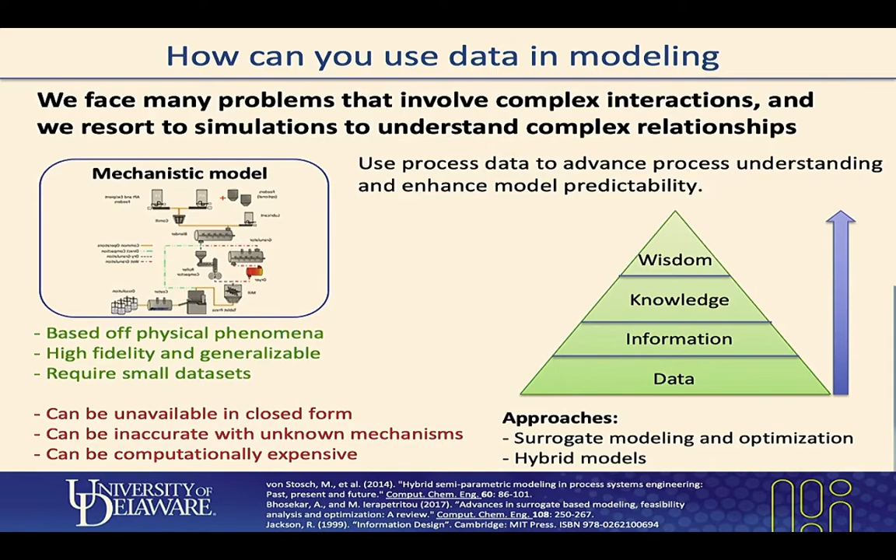So how can you bring this into the picture of real situations? There are a number of different techniques that appear in the literature, and I'm going to focus just on the simple surrogate models and hybrid models that take the data from different resources. It could be laboratory experiments, it could be data from the plant, or it could be data from large-scale simulations.

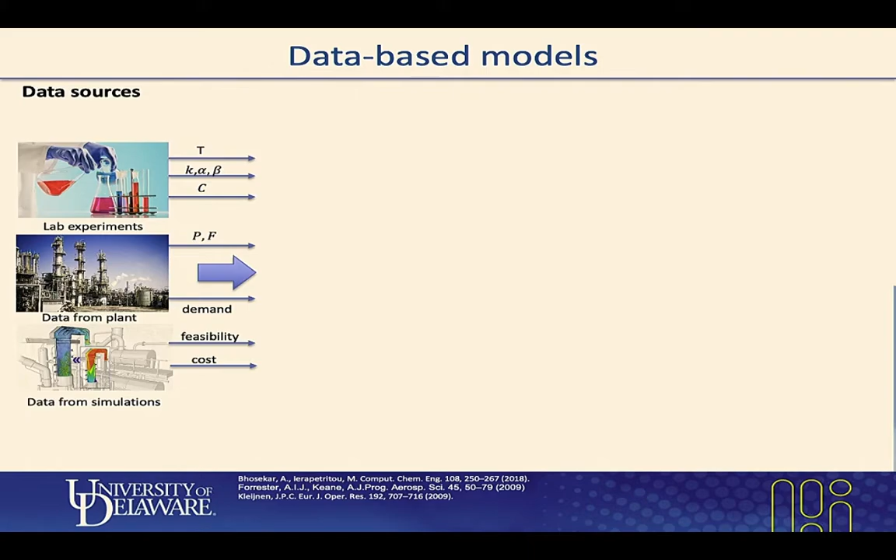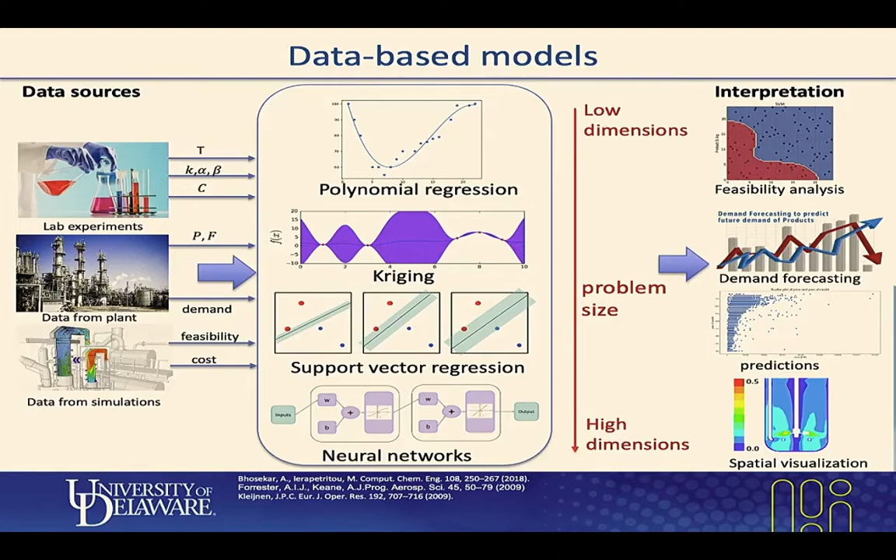Those data can be connected to different parameters that you have or different process variables. And then we utilize a plethora of tools to be able to extract some information about the system. This information could be, and I'm going to show you some applications, whether the process is feasible or not feasible, how can I use demand forecasting to do predictions, or how can I use very detailed computational modeling to produce better products.

So the models that we have seen from this community are either black box models that basically deal with the input-output data, where we're trying to fit some forms, some functions, in order to explain what is the connecting function between the inputs and the outputs, or different combinations of hybrid models, so we can get some idea about different functional groups and incorporate this with our understanding of the data.

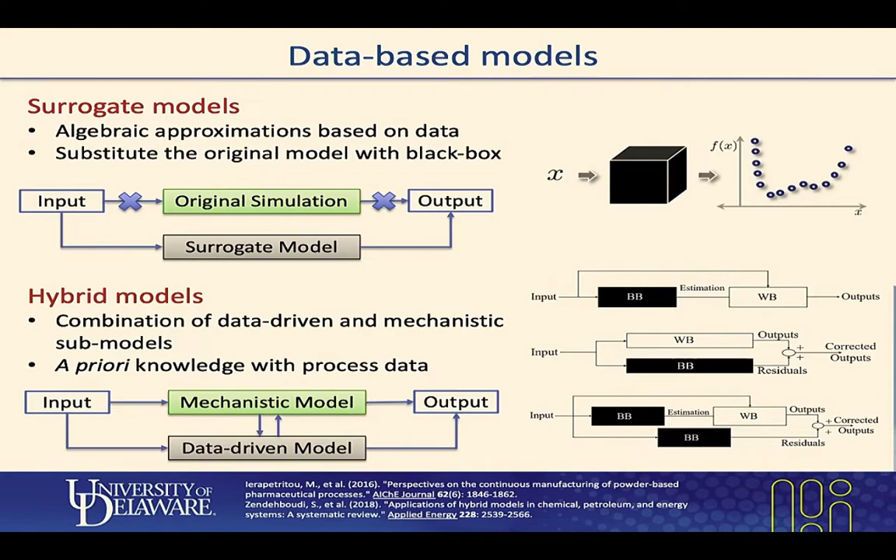I do like to point out the work that Professor Fani Boukouvala is doing, and actually presented yesterday, about the work towards how you can do that more efficiently.

So we have looked at this problem, and we have actually derived two different ideas of how you can do that: either by doing just a sampling and then building the models, and the models could be stationary, or using some type of adaptive sampling to be able to much more intelligently sample the space and produce, using some type of criterion of where these points should be, then stop and use the model.

So if the question is adaptive or not adaptive, then the answer is it depends. If we have a case where you can do both, then trying to extract the best by utilizing the fact that you have just a limited computational resource, it's better to do adaptive. But this is not always the case.

So when you don't have this luxury, and this is where you are having only historical data, so you cannot produce more data as you go, then of course you can just use the data that you have and build out of this. But when you have the capability of doing some more experiments, then this adaptive framework can help you identify where to put that.

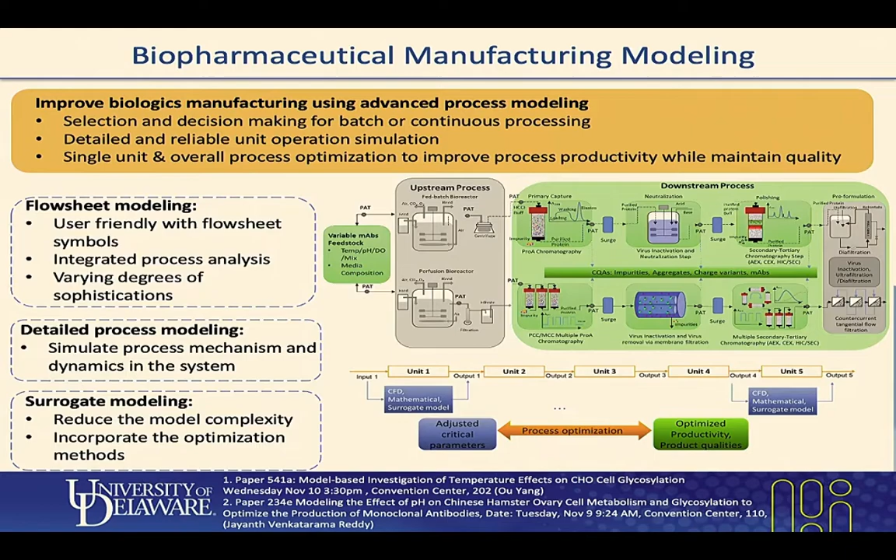So a model is complicated, so even if you come with a very detailed mechanistic model, you need some type of information extraction so you can better utilize, optimize, and so on. That's basically what we've been working on, and in my group there are 2 papers actually given in this conference from students, Yang and Jayanth.

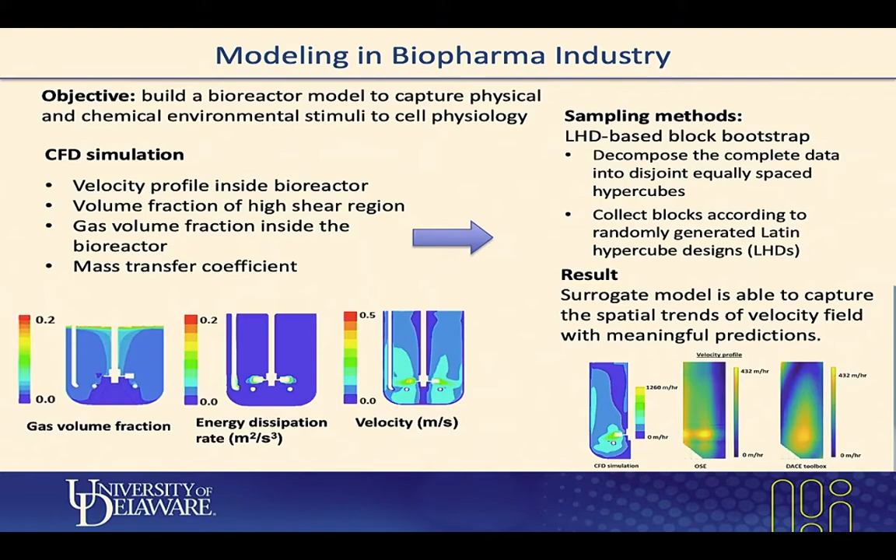Jayanth just gave a talk a couple of minutes before this. We're trying to capture this computational fluid dynamics, but also the metabolic model, and then produce a surrogate model that can extract the necessary information which is needed. We're using a Gaussian process estimator that can predict the behavior of this system at different operating conditions. So if you were able to do that, having the integrating model so we can capture the different effects we see, and then optimize it.

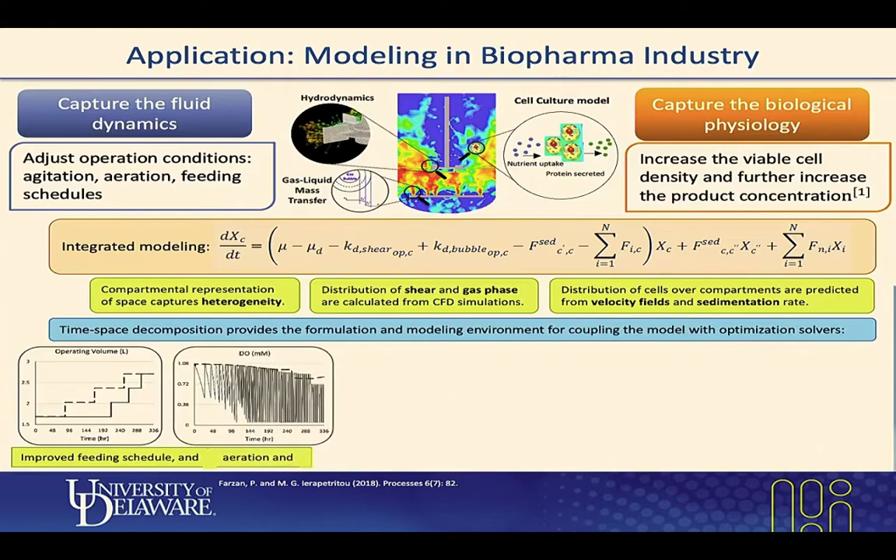So we can optimize the feeding schedule, optimize aeration, agitation policy, and of course be able to keep the cells alive and produce the right product. That's an example of how you can utilize surrogate modeling to capture information from an expensive simulation.

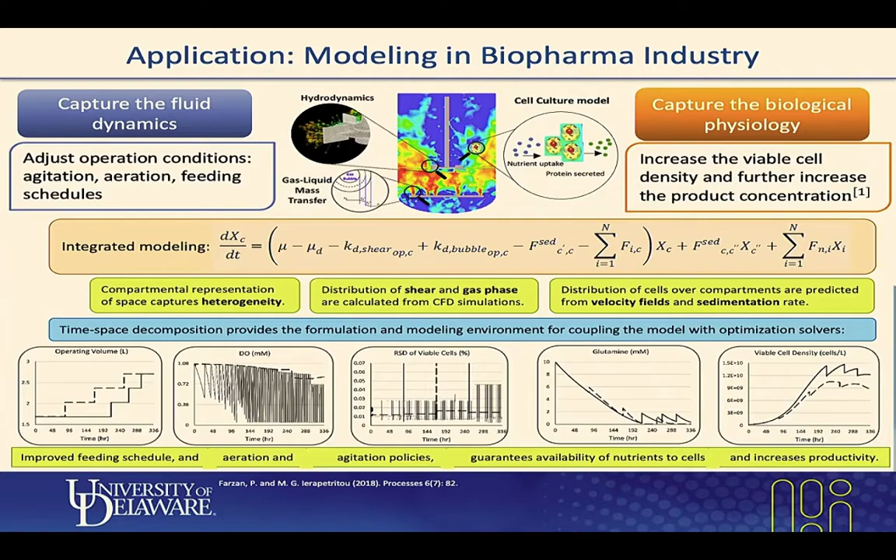The next example again comes from the pharmaceutical industry and goes more into the development of the design space, which in our community is given the feasibility space. We're trying to identify, in terms of the operating conditions, where we are feasible, where we are able to operate and get the product with the right specifications in terms of product quality.

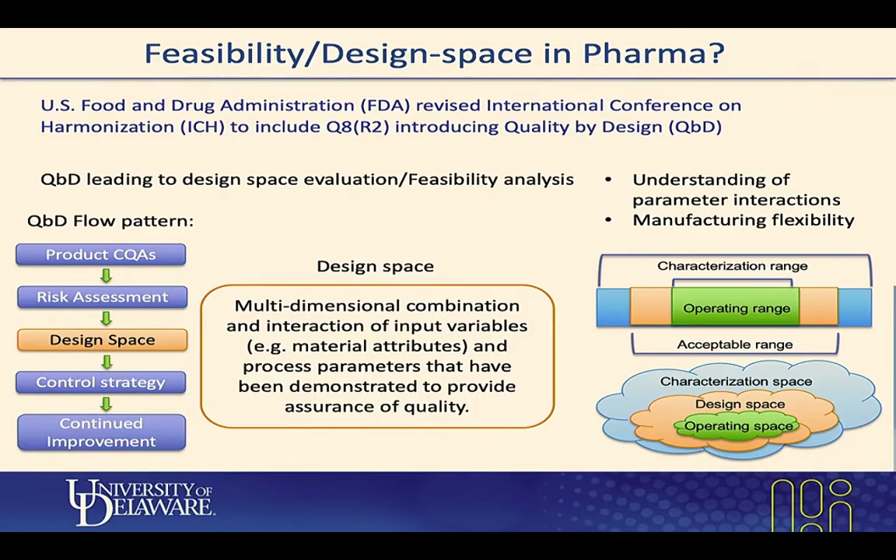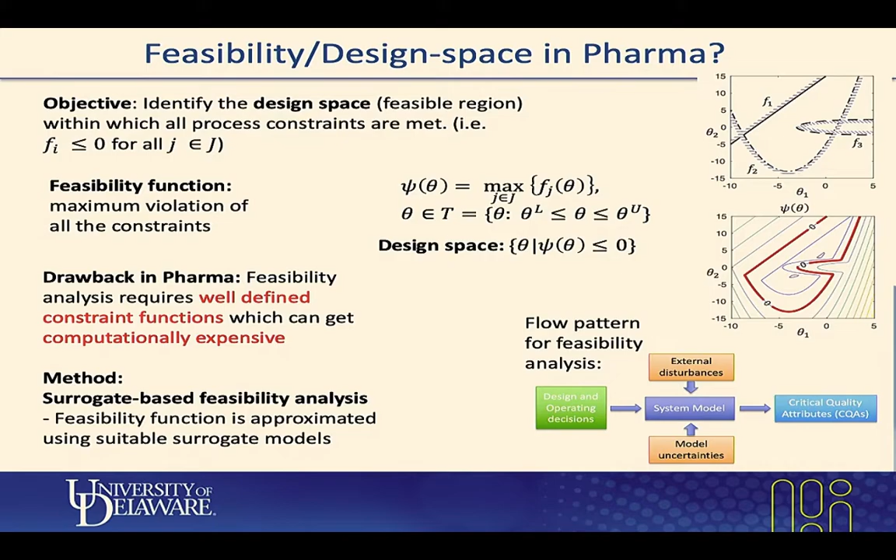So we can look at this system, and this is work we've done over the years in the context of the ERC I mentioned before, identifying using data the feasible space, using the ideas of flexibility analysis, going back to Professor Floudas and Professor Ignacio Grossmann, that identify the actual enclosure of where the process is feasible. Where the data comes into the picture is that this is a complicated design space. Most of the theories that exist give very good results, but only when you have convexity assumptions. Here we don't have convexity assumptions.

We don't even know the shape of the feasible space. So we were operating under the conditions that, okay, I can get some data from running my expensive computer simulators and then try to see how efficiently I can find out where I am feasible to operate. This is what we're doing here with an expected improvement function, which basically tries to put points more closely to the boundary of the feasible space and not all over the place, and then building the final model.

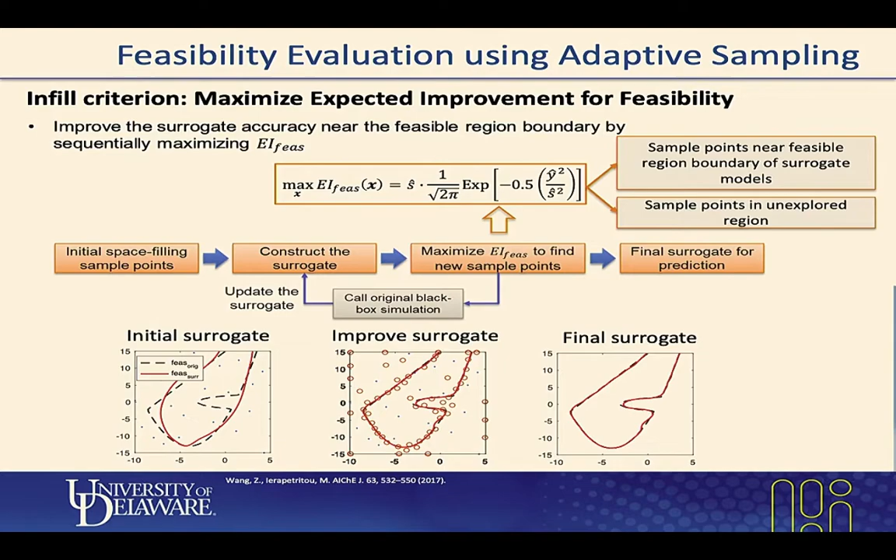So we have applied that, and I'm glad that Rex came before me because he gave a nice introduction of the work the group has been doing over the years trying to model the production of solid-based drug manufacturing. This is the line as it has been built, both instances at Purdue University and Rutgers University.

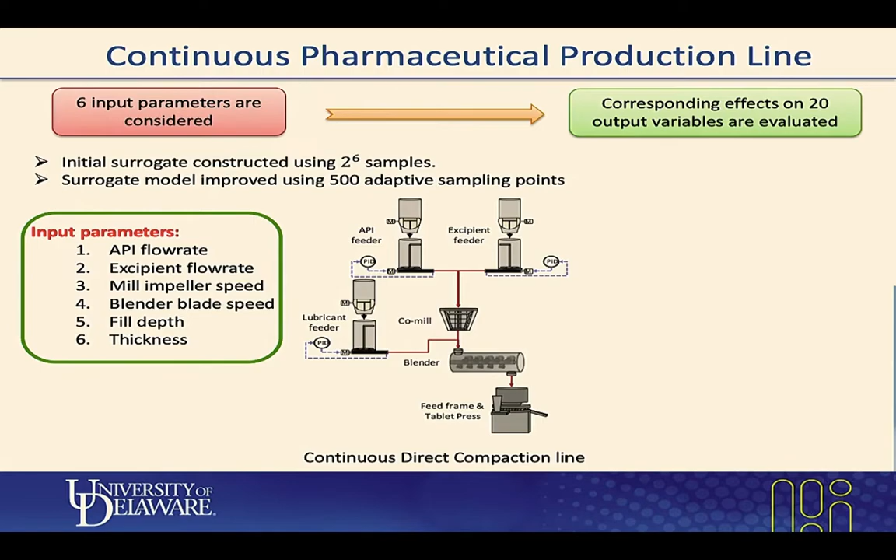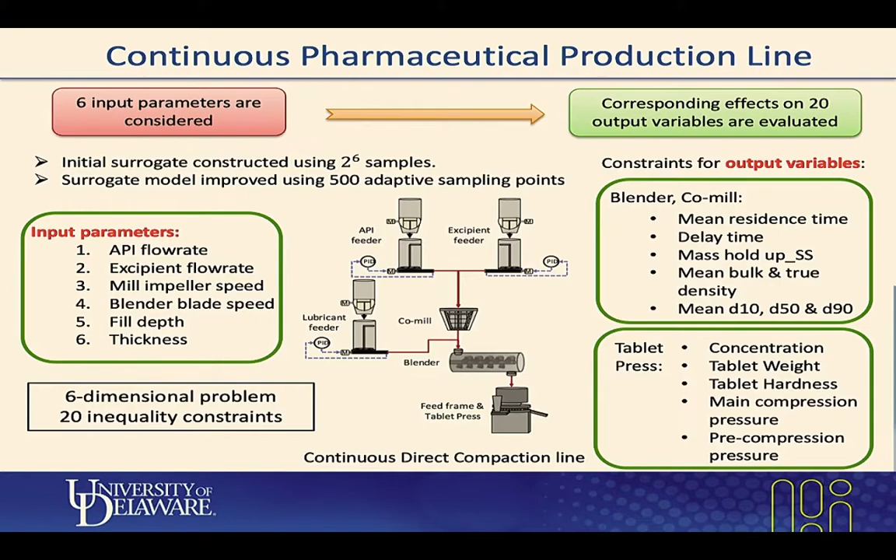Now we were looking at this in terms of the input-output mapping and identifying the design space. The space where all those input parameters, including, for example, flow rate of the API, the excipient, blender speed, and fill depth, all operating conditions of the manufacturing line, how we can adjust these but still be feasible. If you do the analysis as I presented, you identify the range of conditions, including within these red lines, where the design is feasible to operate.

So if it is large like this one, then you have more flexibility. But if it is narrow like that, you have to apply very close, tight control so as to be able to guarantee quality.

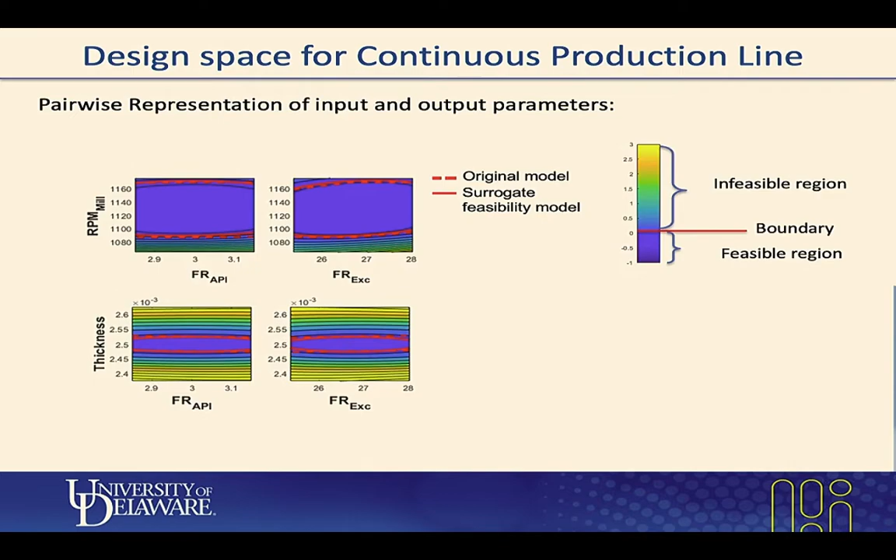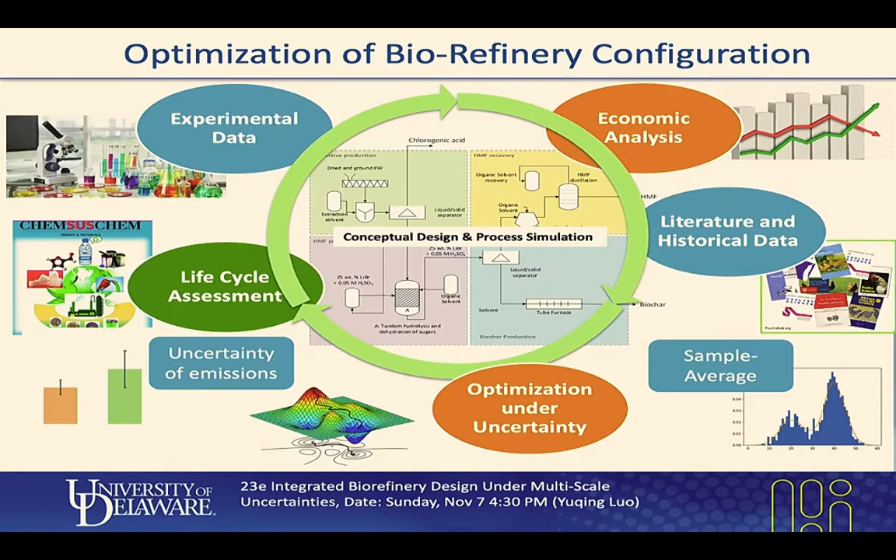So with that, I had another example, but I see I'm running out of time. For those of you who are interested, my student presented this — it's work we're doing in the area of biomass conversion to chemicals and fuels, and I thought Venkat would have been interested in this. But again, due to lack of time, I will not present this, but I would like to acknowledge financial sources.